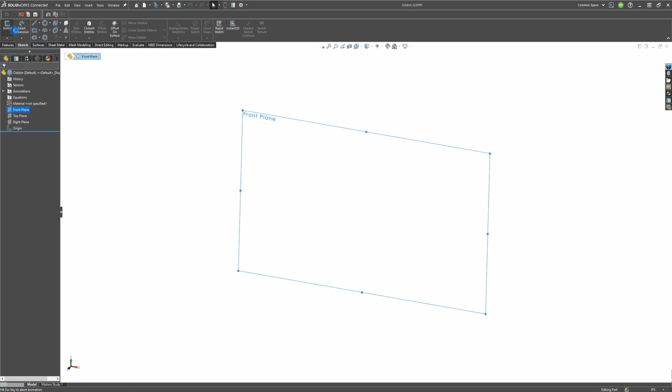So we'll start off with making the body. We'll start on the front plane and sketch our shape. Our shape is fairly flat on the bottom. I'm going to use a spline to shape the sides, get to the top, and then finish up the top round portion.

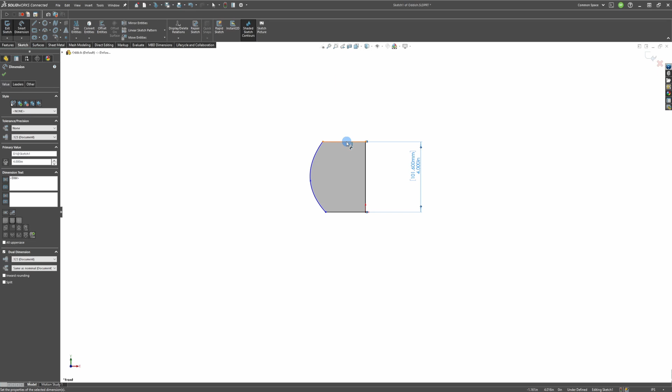We'll make our planter approximately 4 inches. And then we'll make our top fairly large at 2.5 and our bottom slightly smaller than that at 2 inches.

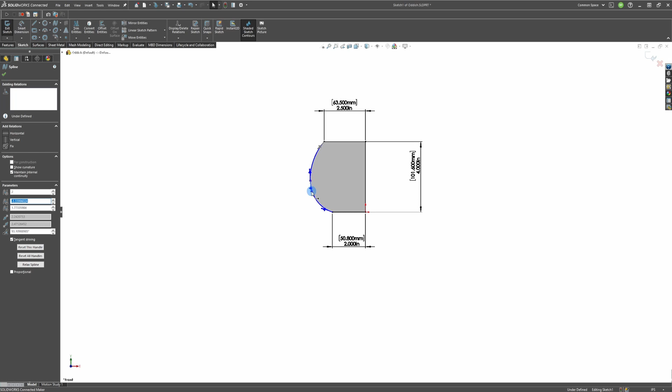Now, Oddish kind of has it bottom heavy, so I'm going to move this portion at the bottom to kind of give it a bigger bottom, and then slightly have it more tapered on top.

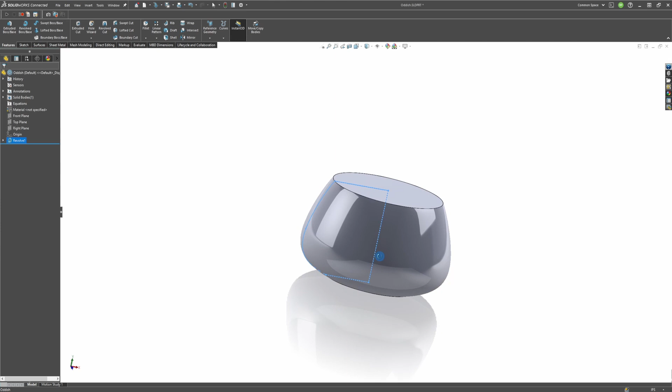That looks fairly good. So we'll save that, and then we'll do a revolve around the axis, and there we go. We have a kind of wine glass looking shape, but that's okay.

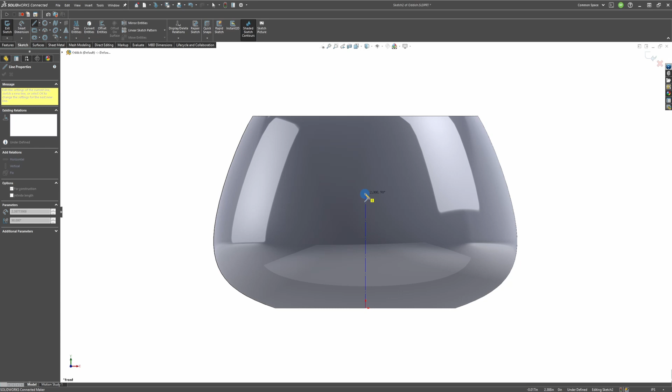So now we just want to shell this out and go back to the front plane, and sketch in the face. We'll start in the center and go up to approximately 70% of our total height, so that way we can do 4 times 0.7, and then we'll have another construction line from the left and right side.

These will be approximately 1.5 inches away from the middle. A little far, we'll do 1. And then I can set these two to equal.

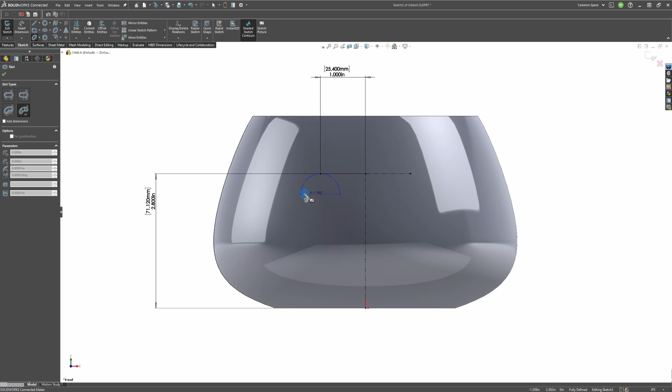Now let's draw in our happy face. I'm going to use the center point arc. We'll start down here, go approximately around here, match up to the top, and then make a full semicircle and go for a tiny little one. After this we can mirror to the other side.

So I'll grab this sketch, hit mirror entity, hit this, and mirror to our center line. There we go, we have a small little happy face, and we can do the same for the bottom.

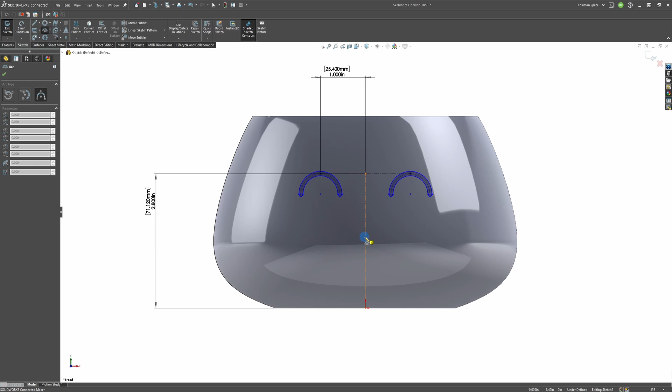So I'll start with an arc here, right at the eyes, right in the center of the eyes again, big old smile, and finish it off with that line across.

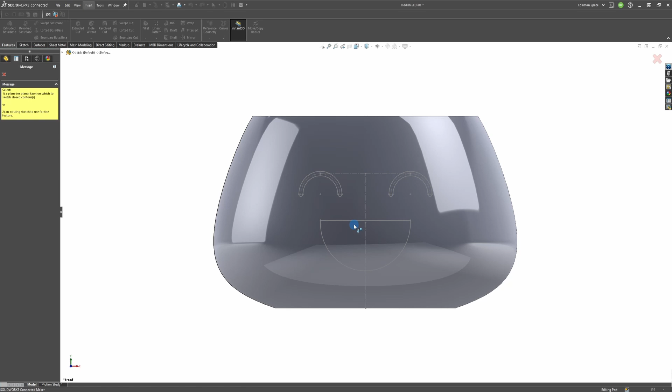There we go. Now I can do a text wrap. I'm going to use the wrap and deboss into it, approximately 15 thou, just so we can see it when we print it out. And there we have it, just a little happy face for our Oddish.

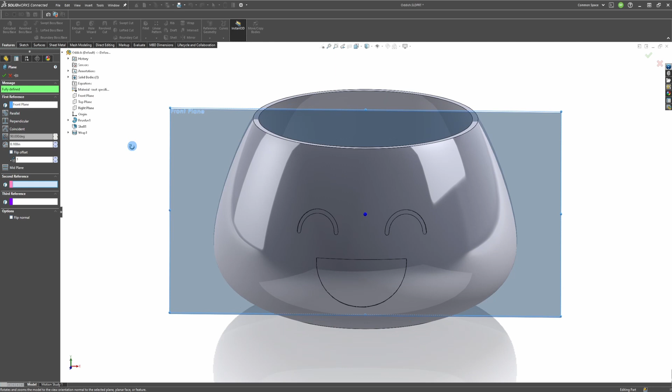So now let's go and draw in the feet. I am actually going to create a plane. It will be parallel to the front plane, and we're going to move it out in front of it so we can see it. Now we go to our plane and sketch out our feet.

I want my feet to kind of be on the side over here, and then I am going to sketch out an ellipse. It'll be right around the lip and just as wide as this one. And if I trim off this and this guy, I have the feet.

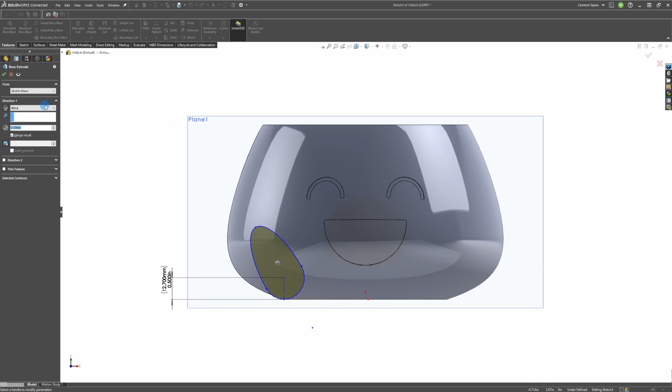I'll extrude this out to be half an inch. It's going out this way. I actually want to go out the other way toward the body, and I'm not going to merge it. So now I have it going inside, and it's slightly going in.

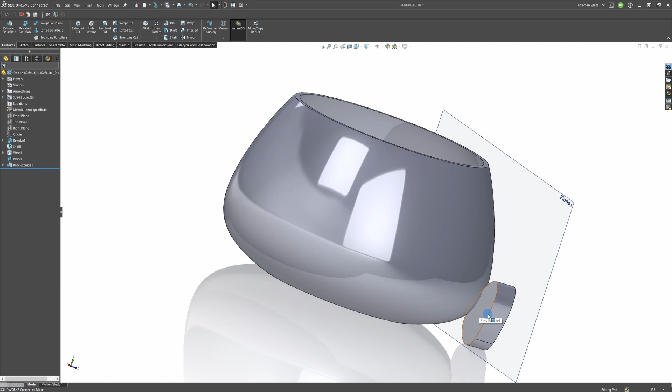So now that I have these little feet, it's very circular. What I want to do is actually fillet both of the sides to the same depth as my extrude, and now we have a more rounded, cuter shape.

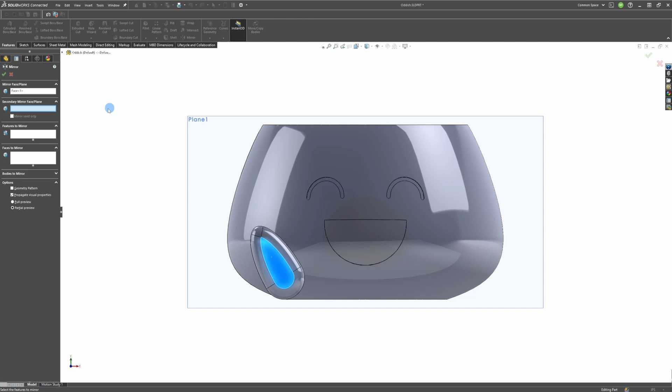Perfect. So let's mirror this piece to the other side. Hit the mirror, I want to mirror off of the right plane, and the feature that I want to mirror is the feet and the fillet.

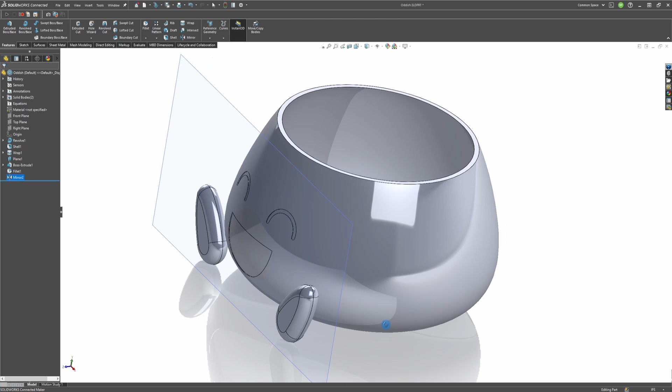So now it's giving me an error talking about only merge features. So we hit this geometry pattern. It allows us to put the piece, and now I have two identical pieces for the legs. I can still see the happy face, so this is good.

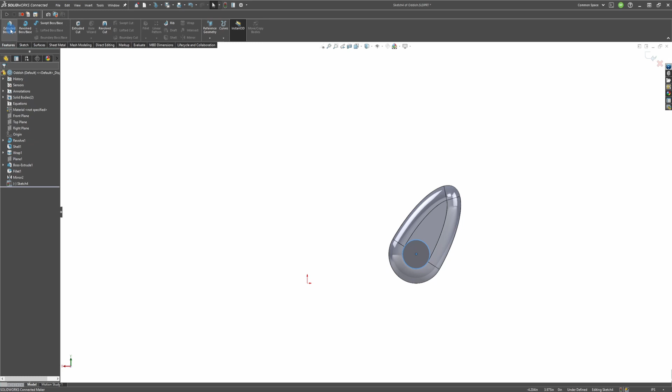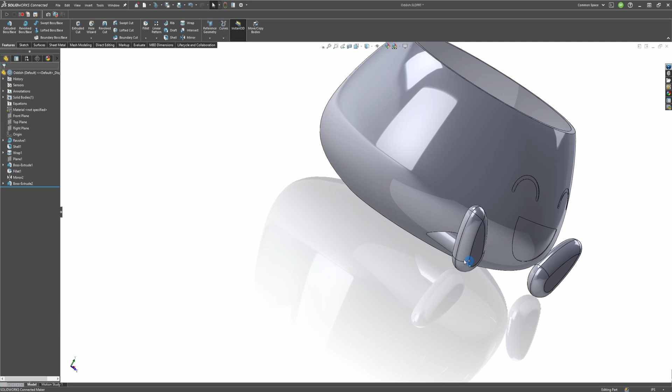I'm going to hide this plane, and now we're going to the back to add in the connection to the feet. This is in the way, so I can just hide it, and then I can extrude this out. I need to bring this back, so we'll extrude this out and go to the next. Now you can see it's going up and sticking to the body of Oddish. There we go. Now I can do the exact same thing for the other side, but I'm just going to mirror it with the right plane, and there we go.

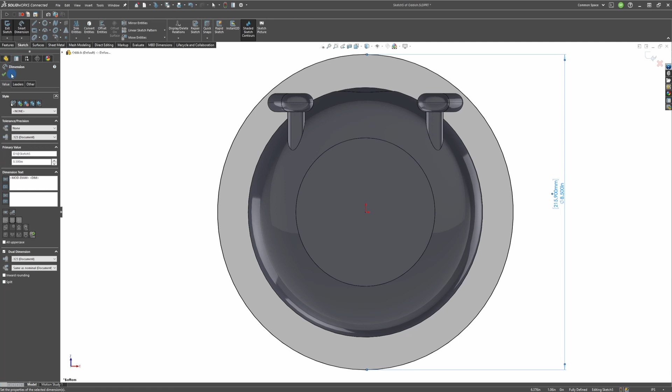Now we have two identical pieces on both sides. So now let's create the saucer. We'll go to the bottom plane and sketch out a circle. Our circle should be larger than our whole piece, and I'll have it at 8.5 inches. I don't necessarily need this to be very thick, so I'm just going to make it 0.1 inch.

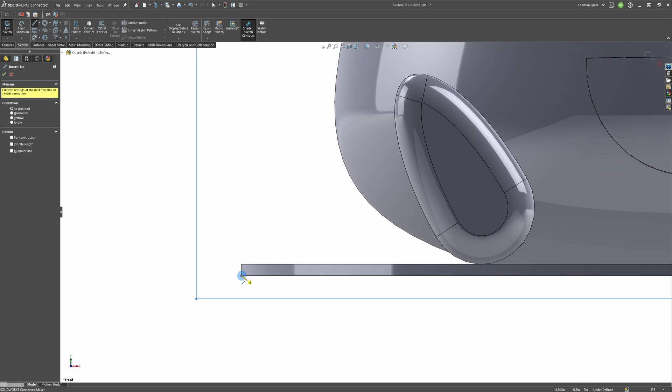This is just very basic, but I'll try to add some flowers, you can say, but not very good. It's like a simple way to do it. So I'll go to the front plane, insert a line, and I want to go at 45 degrees, and I will make this length half an inch.

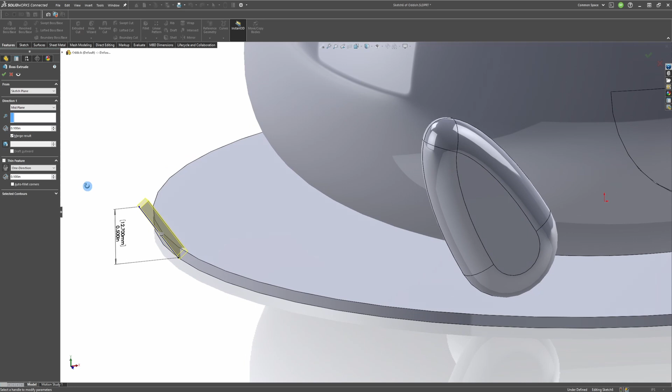Now we can extrude this, and I'm going to do it through the middle at a thickness of 0.2. Actually, at a thickness of 0.1. Widen this out to half an inch. So now I have a block right here, very blocky and ugly, so let's fillet this. Grab this side, grab this side, and then lastly this side.

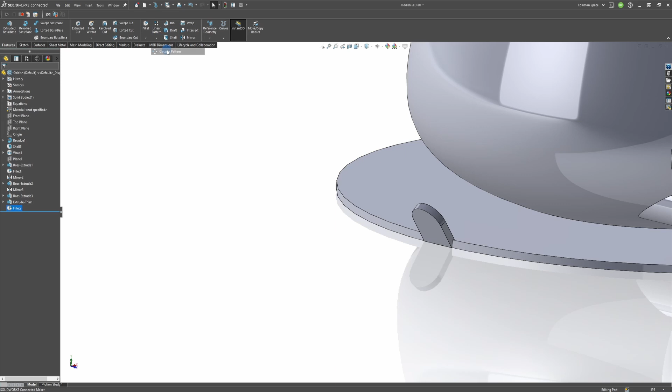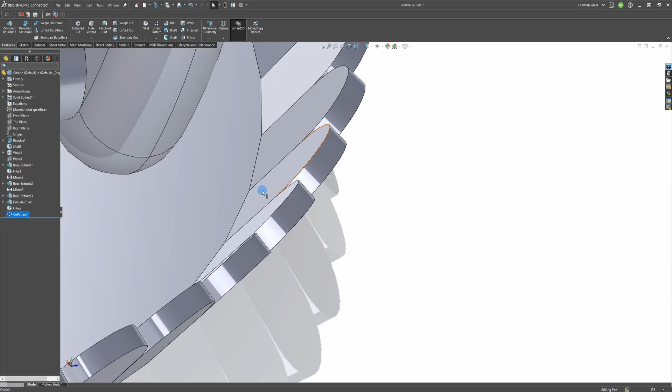Now we have one piece, and I can just do a circular pattern around everything. So here's our direction, the large one. And right now I should only grab the fillet, so I want to grab this thin piece also. Right now it's at 55. They look like they're crossing just slightly, which is okay, and I'll accept. Everything looks like it's smooth. I don't think there are any gaps, and there you have it. And Oddish with a weird looking saucer.

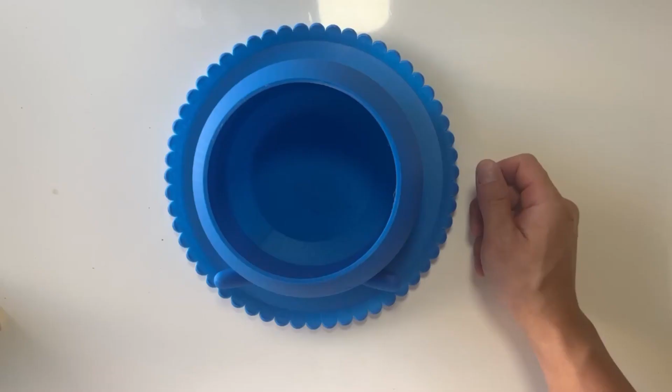So what I want to do now is test to make sure that it doesn't leak. So I'll pour some water into here. Nice, holding the water, nothing's getting wet. Perfect. Now if I pour it on the side right here, same thing, no leaks. Great. You know that it works.

So because I forgot to put in the drain hole, I don't want to drill into it. So instead I'm just going to fill up the bottom with rocks. The rocks will help prevent the plants from getting root rot. So what I'm going to do is I have some little rocks right here, pour it inside. Just need to be able to fill up the bottom. Don't need too much. And then now that I have it filled up with some dirt, I'm going to put the plant right in the center.